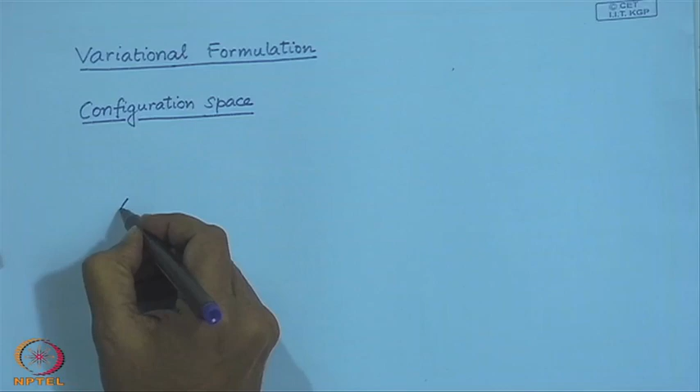Now, what is this configuration space? Let us picture a string, a taut string which has been displaced from its equilibrium position, which is the x axis. Now, suppose I want to represent or track the configuration of this string. The simplest thing I can think of is to track certain particles or material points on this string.

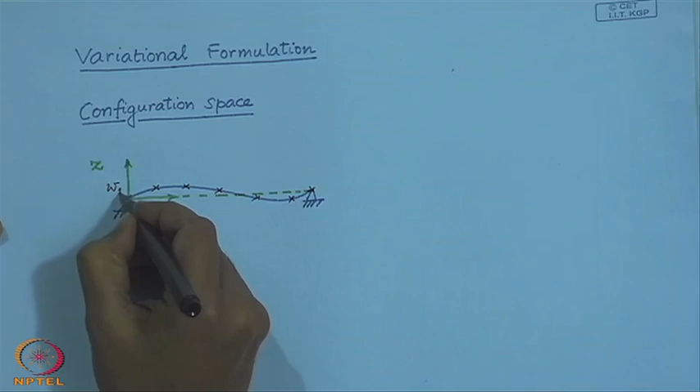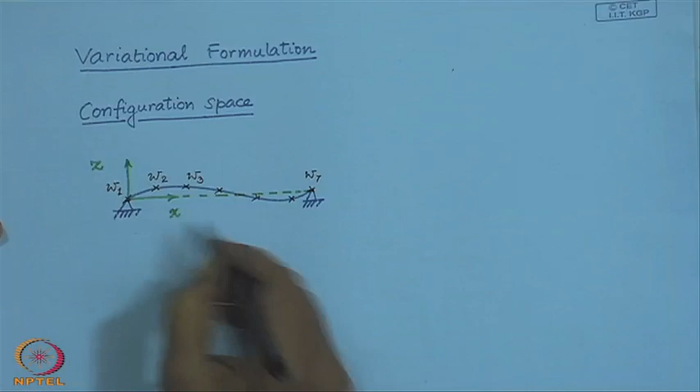So here, for example, I have 7 points. Let me call the displacement corresponding to these points as W1, W2, W3, etcetera up to W7. Now, to visualize the configuration of the string at this instant, I can think of an Euclidean-like space. What I have done is taken 3 axes, and that is the best I can draw: W1, W2, W3, and then there are axes like this up to W7.

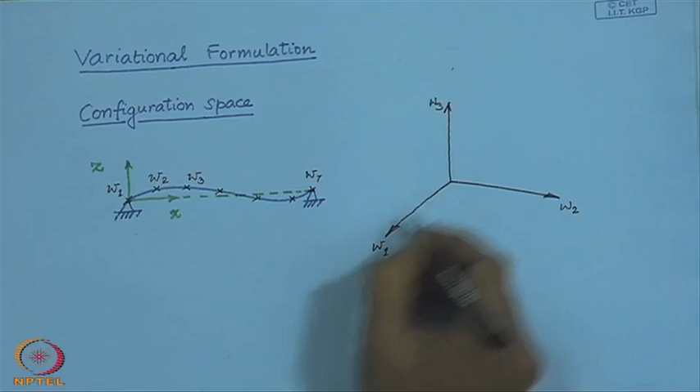I cannot draw a space with 7 axes here, but I will appeal to your imagination to think of a space with 7 such axes, and mark on each axis the displacement of each point. Say, for example, W1 is 0, W2 has a certain displacement, W3 has a certain displacement, and so on. In this space, which is now a 7 dimensional space, there is a point which represents this configuration. So in such a space, a point represents a configuration. This point, for example, represents this configuration of the string.

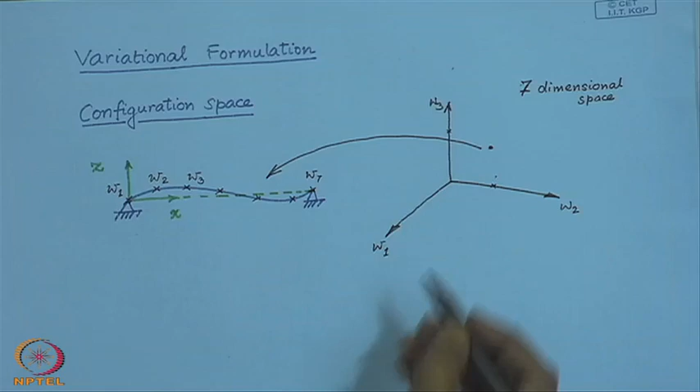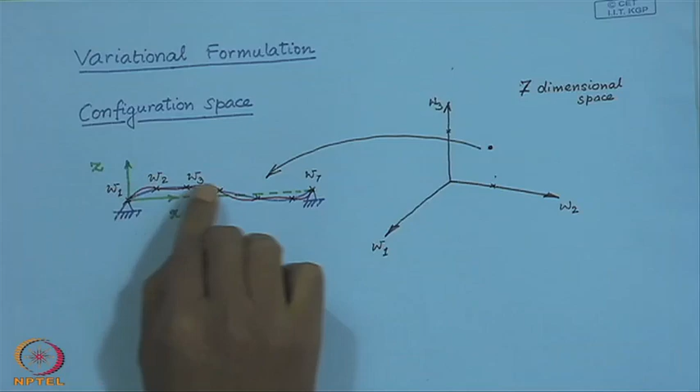But suppose now this string is actually like this. Then also these 7 points have the same locations. I have drawn this red configuration of the string very carefully, so that this point in the 7 dimensional space is the configuration of the string, but we can see from this figure that it is not exactly the same as the previous blue configuration. So what do we do?

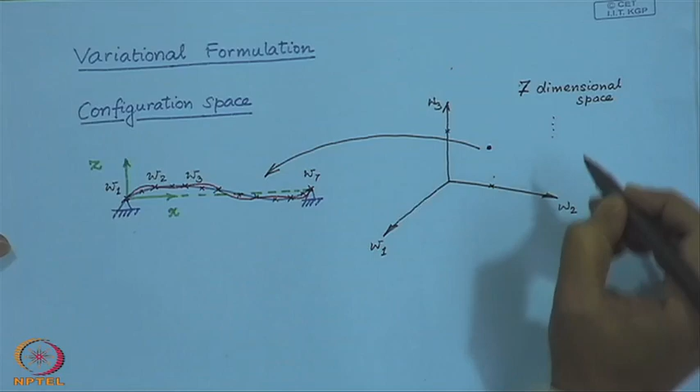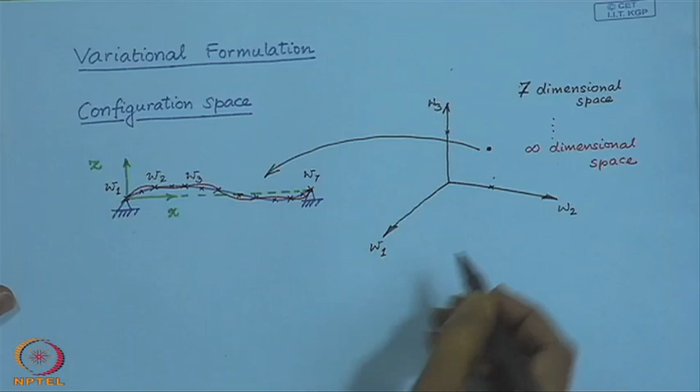We increase the number of points, and if you go on increasing the number of points like this to capture more and more configurations, or infinitely many possible configurations, finally what you come to is an infinite dimensional space, which can track the configurations of the string. So finally, we require an infinite dimensional space to represent all possible configurations of the string.

Then, as you can see, such infinite possibilities, if you want to represent them, require what are known as field variables, and that is what we have been using till now. So W, the transverse displacement of the string from the equilibrium position, is therefore represented as a field variable which can capture all these infinite possible configurations of the string. This space, in which a point represents any configuration of the string, is known as the configuration space of the string.

So therefore you can clearly see that for a string, and for any continuous system, the dimension of the configuration space is infinity. Such continuous systems are represented as points in an infinite dimensional configuration space, and the number of coordinates of the configuration space represents the degree of freedom of the system. So the degree of freedom of a string, or any continuous system, is infinity.

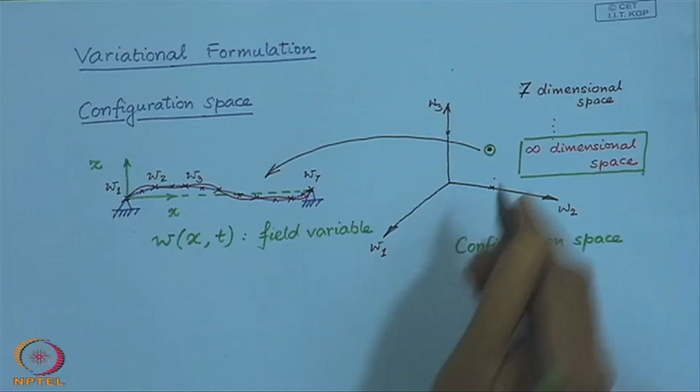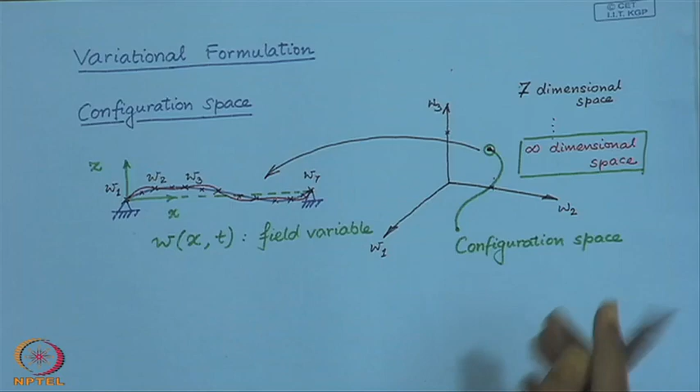What is very important now to move on is to remember that in the configuration space, any configuration of a continuous system is represented by a single point. So, therefore, as the string vibrates, as it moves through configurations, there are trajectories in this configuration space through which the string is going to move. So with this basic definition, let us look at the variational formulation of dynamics.

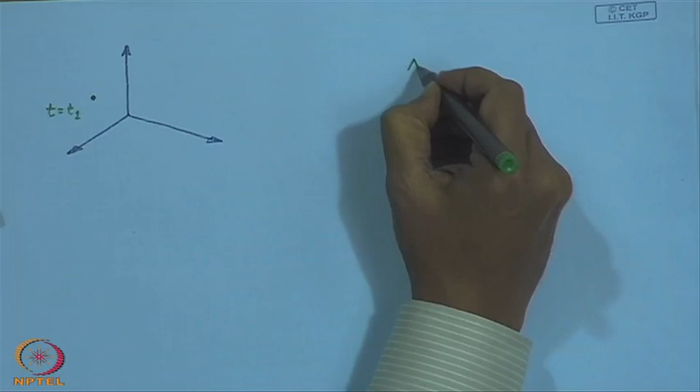Imagine an infinite dimensional configuration space, and at time t equal to, let us say, t1, I observe the configuration of the system is represented by this point, t equal to t1. So this point in the infinite dimensional configuration space represents the configuration of the string, let us say, at time t equal to t1, which may, for example, look like this.

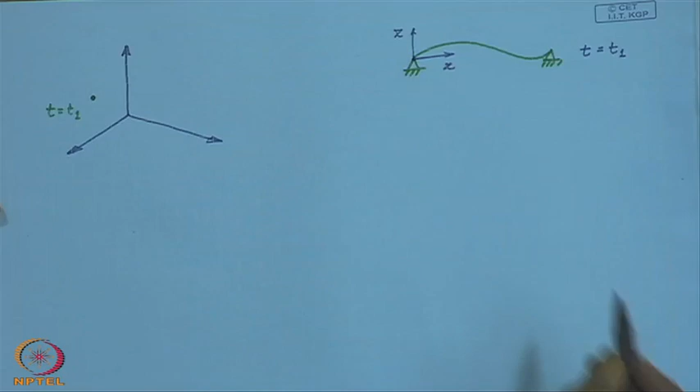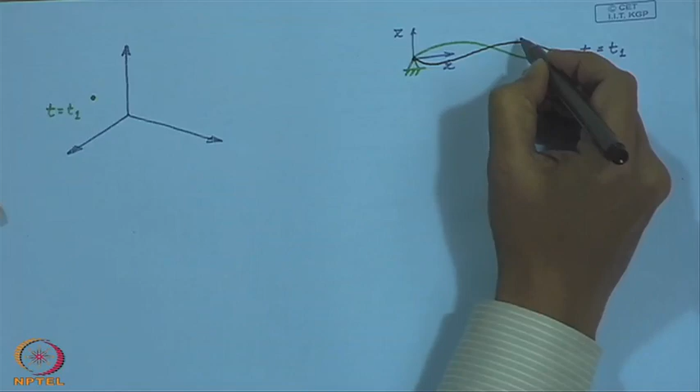Now, this is the configuration of the string that I have observed at time t equal to t1. Now suppose I close my eyes and allow this string to move, and suppose at time t equal to t2 it attains a configuration like this. So this was the configuration at time t equal to t1, and the black configuration is the configuration of the string at time t equal to t2. So at time t equal to t2, I have opened my eyes and I observe the configuration of the string to be this, which is another point in the configuration space of the string.

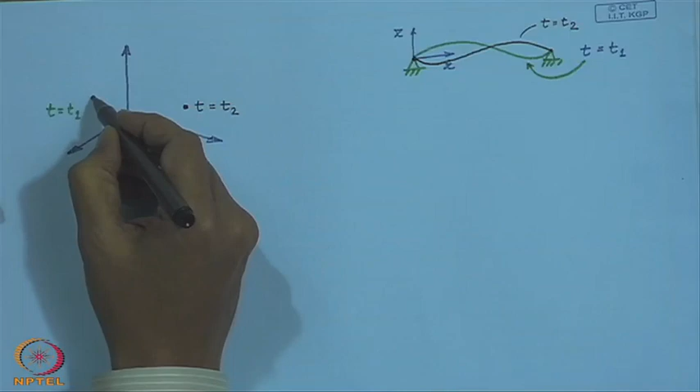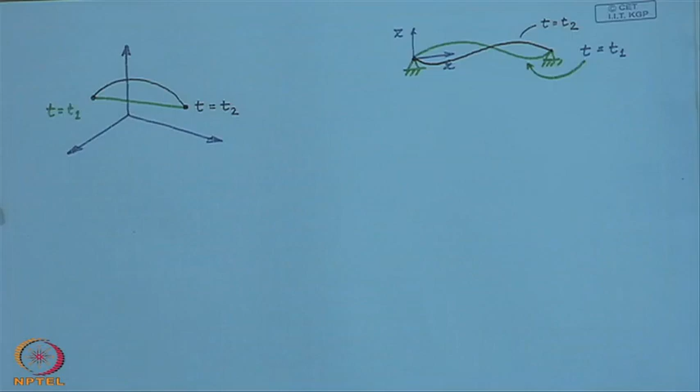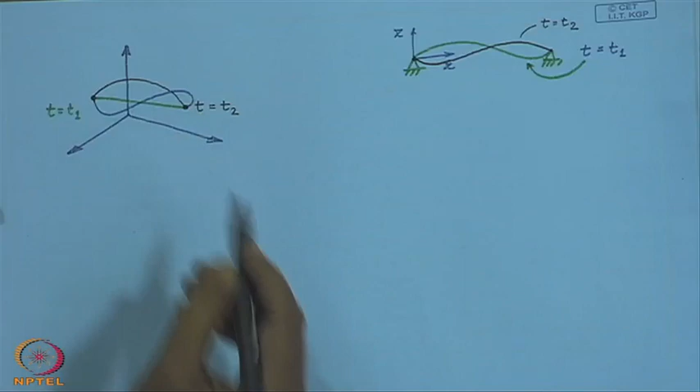Now the question is, how did the string move from this configuration at time t equal to t1 to this configuration at time t equal to t2? Well, it could have moved in this manner, or it could have moved in this manner, or maybe this. The question is, can I say which path did the string follow in the configuration space? So this is our question.

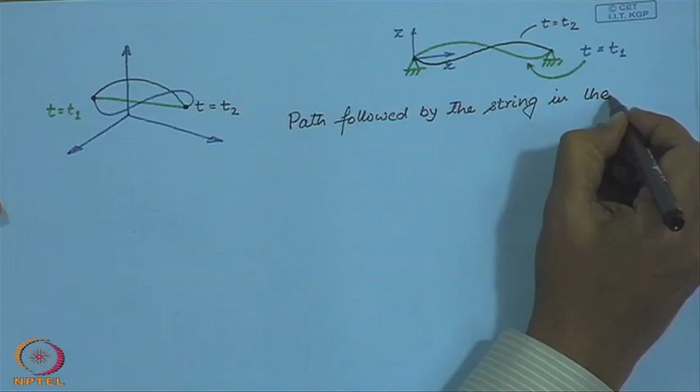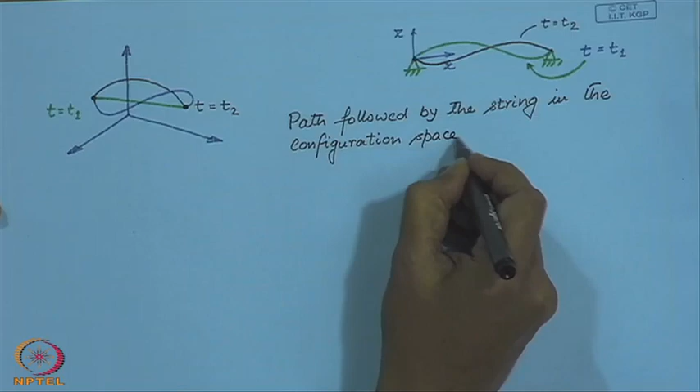So, is there a way of knowing - because I have not seen how it has evolved from this state to this state - is there a way of knowing which path it followed?

So, this question is answered by something known as Hamilton's principle.

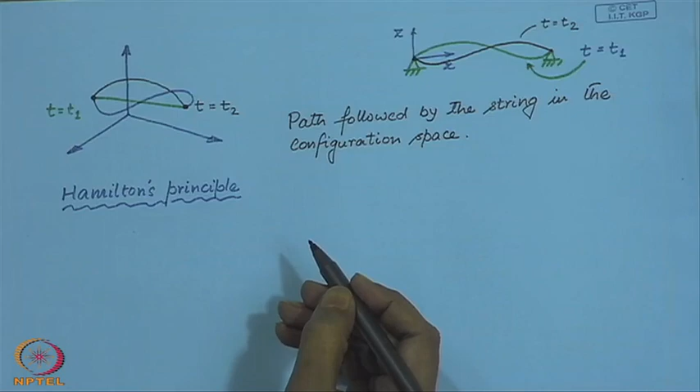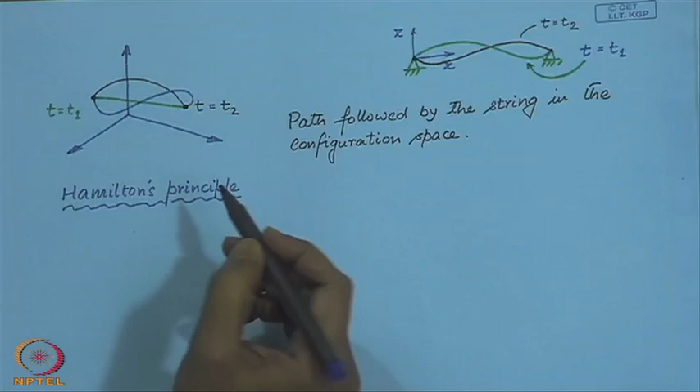So, what is this Hamilton's principle? What Hamilton's principle says is that of all these infinitely many available paths for the system to move from a configuration at time t equal to t1 to another configuration at time t equal to t2, the one the system follows will extremize

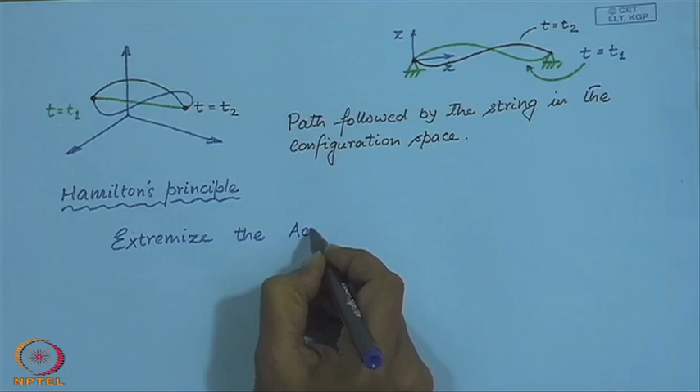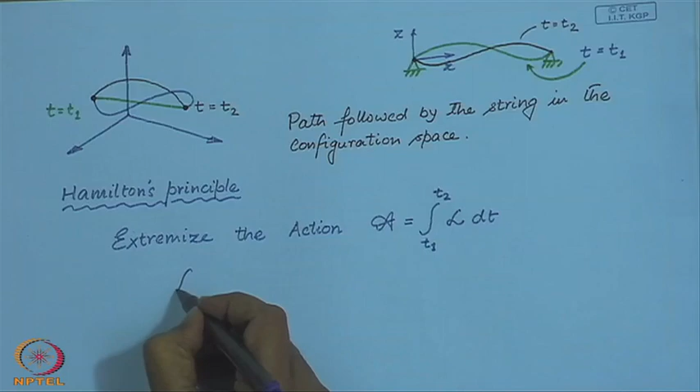the action, which is defined as an integral from t1 to t2 of a scalar known as the Lagrangian, which is again defined as the difference of the kinetic and potential energies of the system.

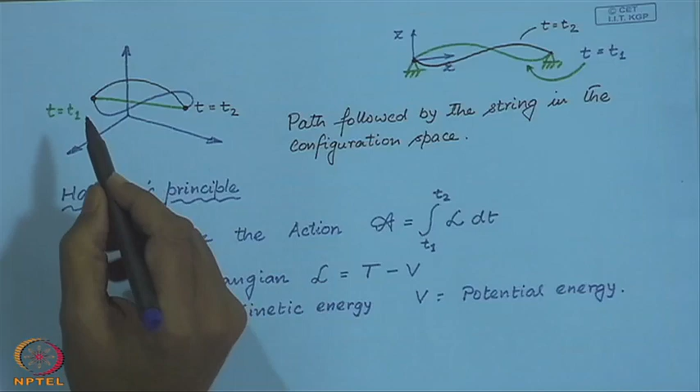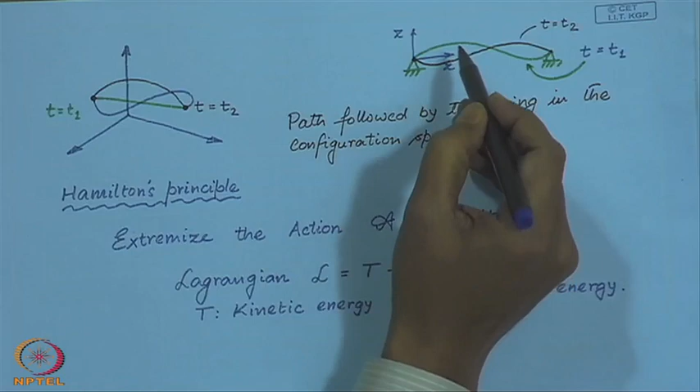So, to reiterate, we have observed two configurations of the string and we have not observed the intermediate configurations - how it went from configuration 1 to configuration 2 - but this principle says that the path taken by the string, or the intermediate configurations attained by the string in moving from configuration 1 to configuration 2, extremizes the action which is defined in this manner.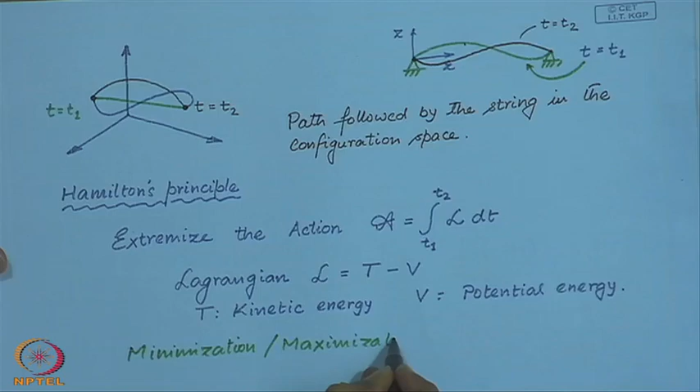Now, what is this extremization? Extremization has a connotation of minimization or maximization. But in mechanical systems such as a string or a bar, this is the connotation of extremization, which is actually minimization.

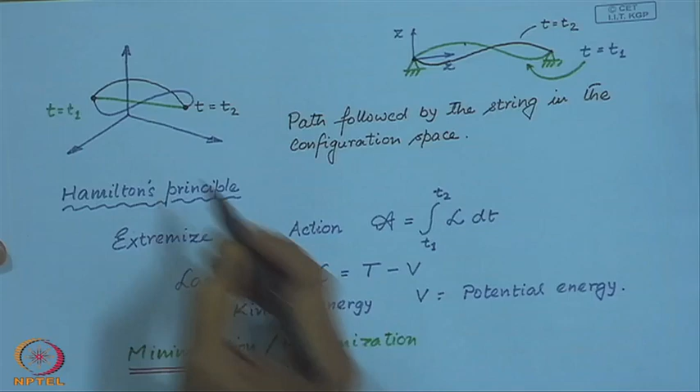Now, let us see what is meant by this extremization. The thing that has to be understood is this: we are talking in terms of paths in the configuration space. So, this action is a function of this path, which is a function of time.

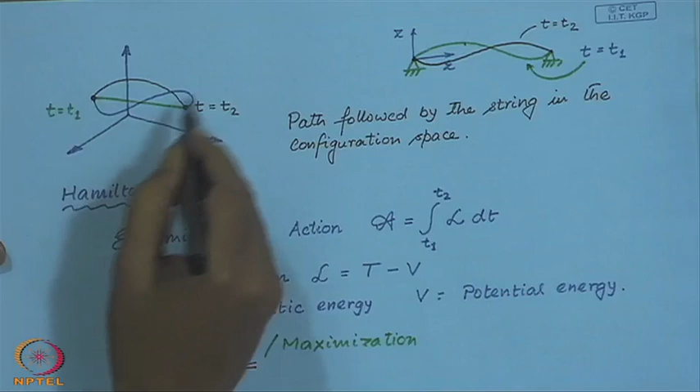So, this action - given the motion of the string, or given the path taken by the string from configuration 1 to configuration 2, which is a function of time - we have defined this action as an integral over the scalar function, which is defined in terms of those paths. Such a thing is called a functional.

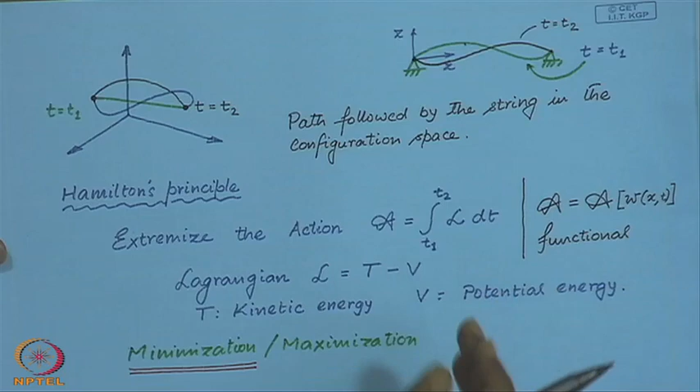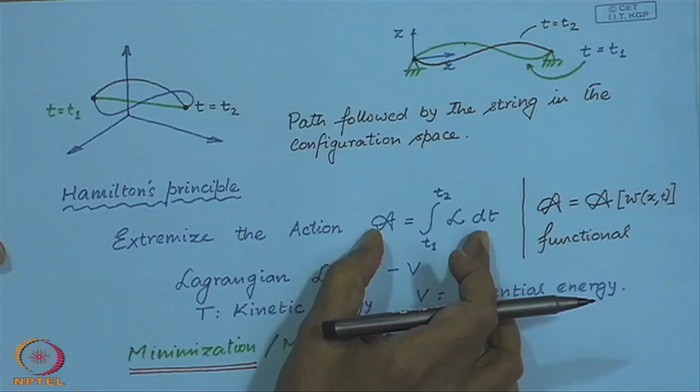So, it is a function of a function. This action is a function of a function. So, we have to minimize over functions. We have to find a function which minimizes the action. Now, this is slightly different from something we talk about in minimization of only functions. So, let us see.

So, suppose you have a function f of x. How do you find out the extremum points? So, these are extremum points. So, what we say is that

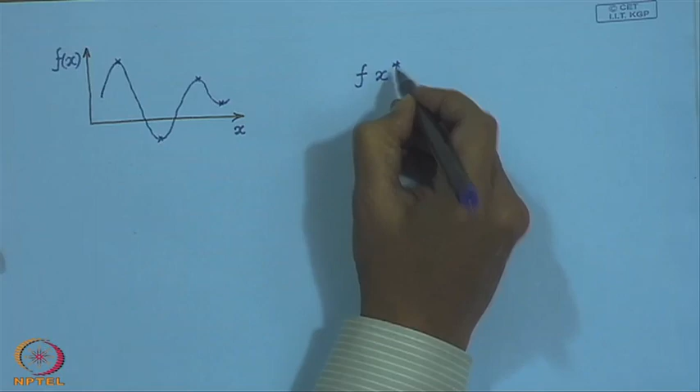suppose x star is an extremum point, in this case a maxima. Then how do we detect that this is a maxima, or how do we detect this point, an extremum point?

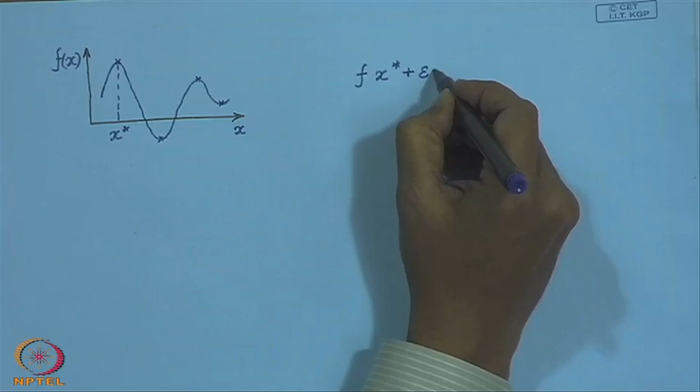So, we make a test. Let us suppose that x star is a solution of an extremum point. Let us make this test. We disturb or perturb this point, x star, by a small amount. I have written this small amount as epsilon times y, where epsilon may be a small quantity.

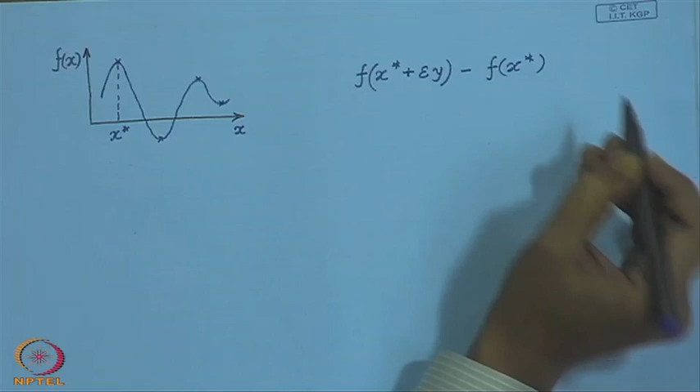Now, if I compare - take this difference, divide by epsilon, and take the limit epsilon tends to 0 - for arbitrary perturbations y, and if this turns out to be 0, then we say we have found an extremum.

So, this is the standard definition, this is in terms of the derivative. This is what we do, but remember this x is a variable.

Now, suppose we want to draw an analogy from here to understand what is Hamilton's principle. So, let me draw an analogy. So, here,

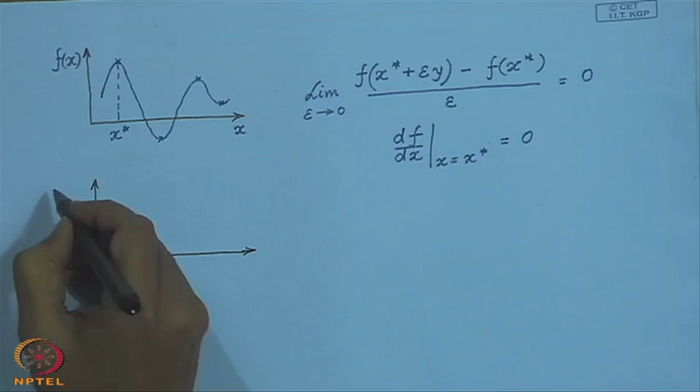by the way, this formulation, this way of doing things, will work even if x is a vector. If x is a vector, then let us see what happens.

If you Taylor expand, then the first term - so this is the first term, there will be further terms. So, finally, those terms will have epsilon. So, when you take this limit, they will vanish.

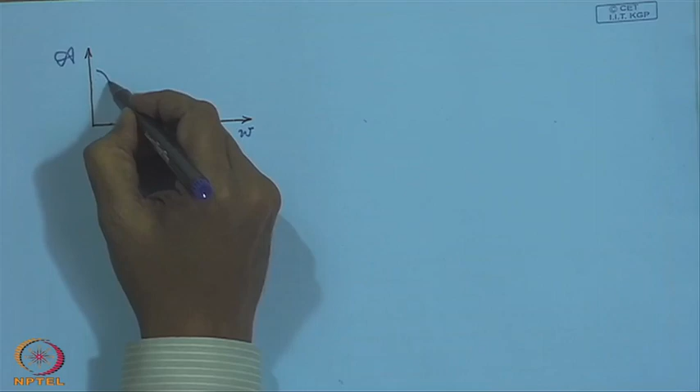So let us imagine for a moment that this is what our calculations result in. If I have to find out the extremum points, then I must calculate this action, and I want to understand in a similar manner what is this extremization.

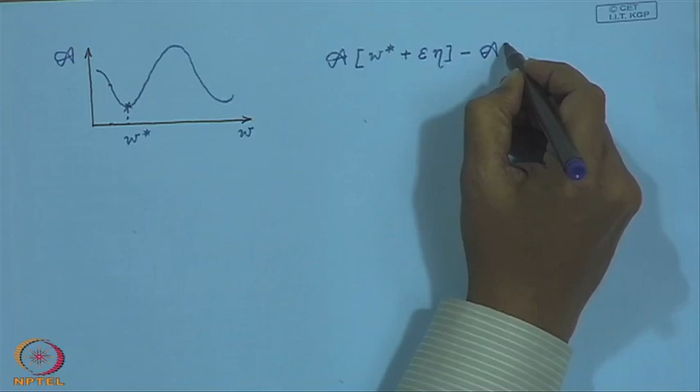So suppose W star is the actual path taken by the particle or by the string as it moves from configuration 1 to configuration 2. This I can perturb with another function eta and a small quantity epsilon, take the difference, divide by epsilon, and take the limit epsilon goes to 0.

And if this turns out to be 0, then I say I have found a path that the string has taken to move from configuration 1 to configuration 2. Remember, this action is being calculated as an integral from T1 to T2 of the Lagrangian.

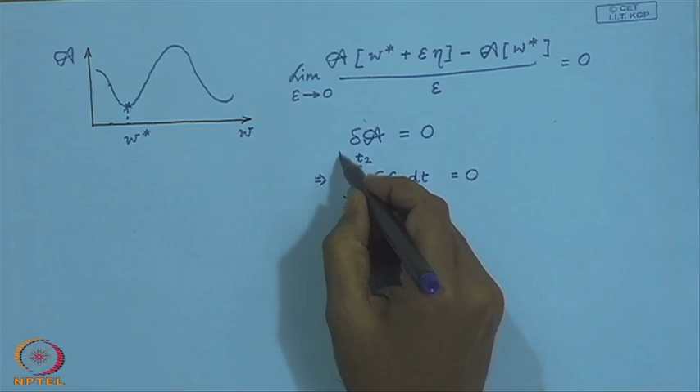Now this is represented in this manner, just as in the case of functions we say del f del x vanishes, here we write delta of the action is equal to 0. So this therefore implies this condition, and this is what we will use in this formulation.

Now what is this delta? Delta is known as the variation operator. It is very similar to a total derivative operator, except that it does not differentiate time. So time is frozen. When this operator is applied, it is assumed that time has been frozen.

All this can be understood if this limit that we have calculated is analyzed. So what we are looking at is paths, and we will be perturbing paths. So time will be held frozen and paths will be perturbed. This variation operator is like a total derivative operator with time frozen.

Now let us go over to some examples and see the application of Hamilton's principle.

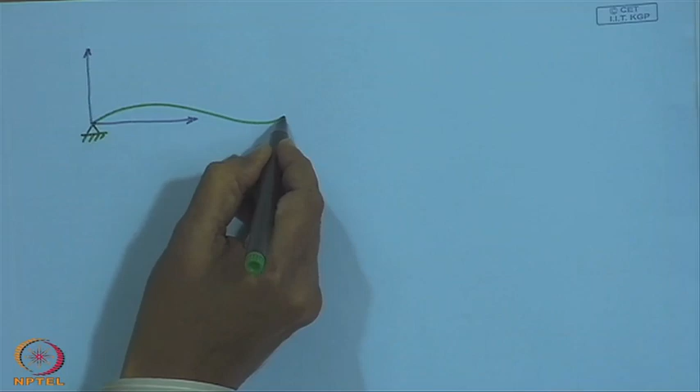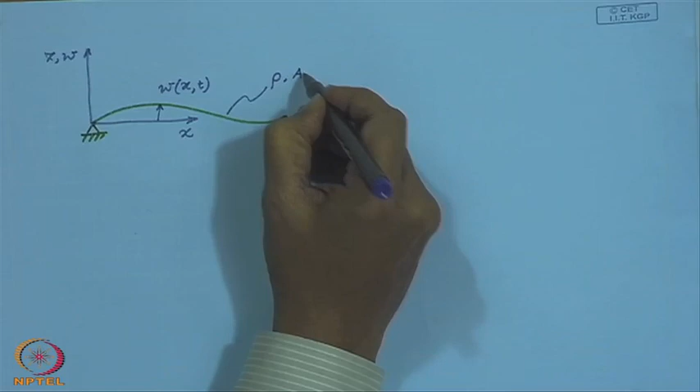So here we have a string whose transverse displacement is represented by this field variable w. We assume that this string is made of a material of density rho, area of cross section A, and is under tension T, and has a length L.

So the first thing that we need to write is the Lagrangian and construct the action integral on which we will apply this variational formulation or Hamilton's principle.

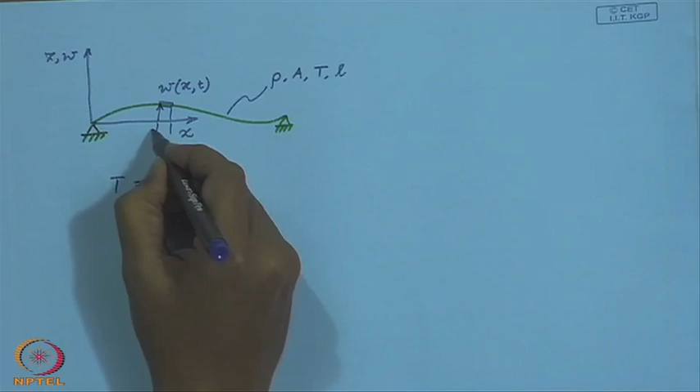So what is the kinetic energy of this string? If I consider a small element of this string at a certain location x, then the mass of this little element is rho A dx, where dx is the length of this infinitesimal element.

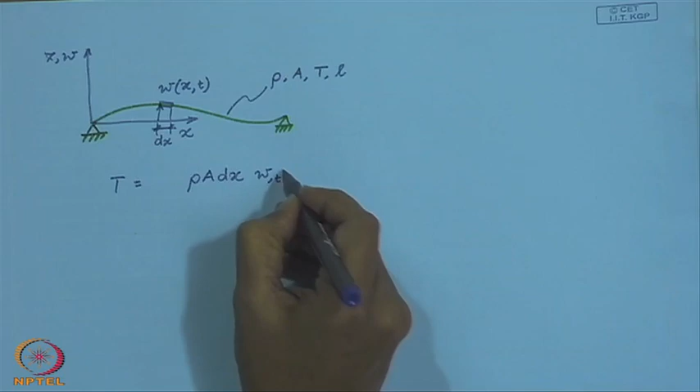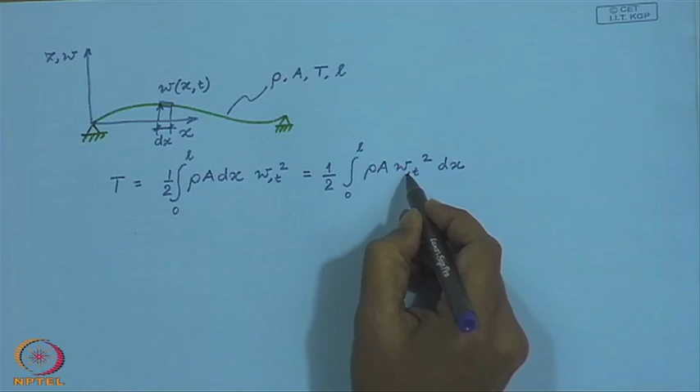Now with this I multiply the velocity square of this little element, and if I integrate this over 0 to L and multiply by a half, then I obtain the kinetic energy of this string. When I write del w del t, so w comma t whole square, this is assumed to be like this. So that is the kinetic energy of the string.

Now we have to write the potential energy. To write the potential energy, let us look at an infinitesimal portion of the string as it goes. So this is the equilibrium configuration.

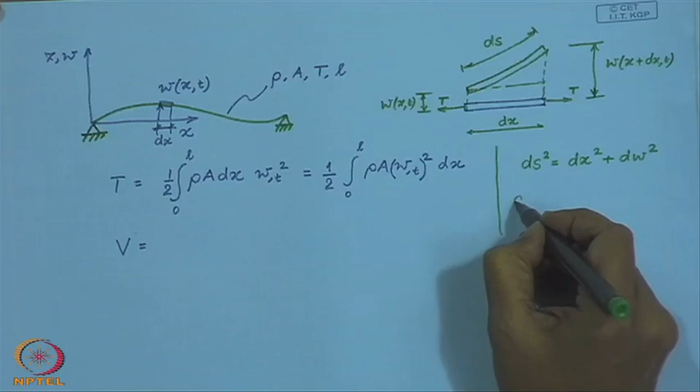So what is this deformed length of the string? This is the transverse displacement at x, and this whole thing is w at x plus dx at time t. So this length can be written as, which may be represented in this manner.

So let us look at the work done by this tension as the string stretches. Tension, which is almost constant, times ds minus dx. Now I integrate this over the length of the string, so that should give me the work done, which is stored as potential energy in the string.

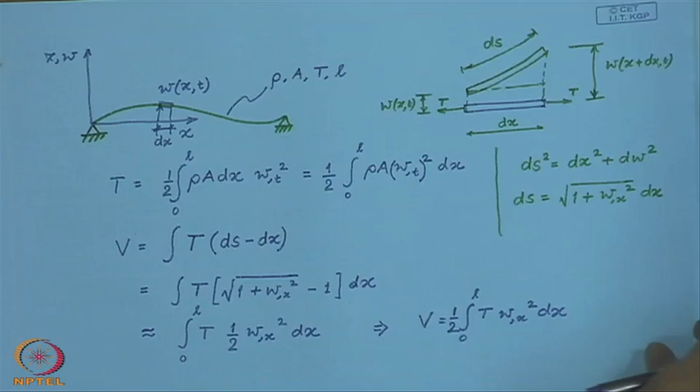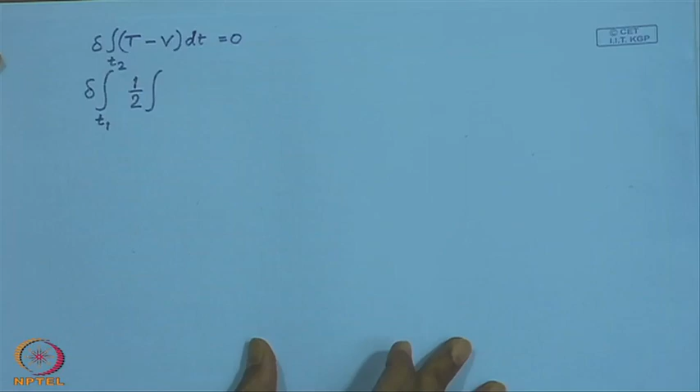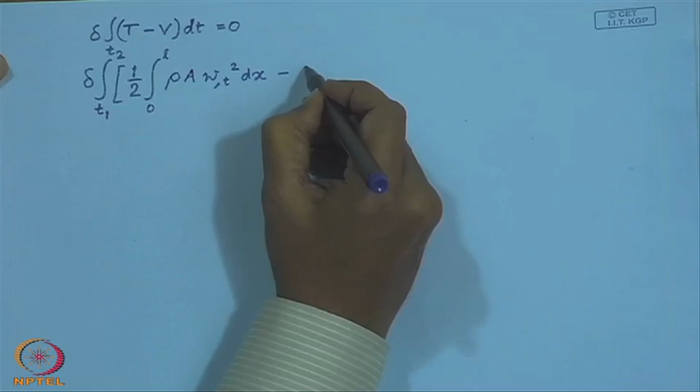Now let us look at the variational principle. So what Hamilton's principle says, let me first write this, which is the statement of Hamilton's principle, which now can be written as this.

And I can simplify this further, in this manner.

Now I am going to apply this variation operator on the integrand to obtain, so del w del t whole square, when I operate, that will give me 2 times del w del t delta of del w del t. Now this 2 will cancel with this half, this 2 in the denominator. So I am writing out the expression after such a simplification.

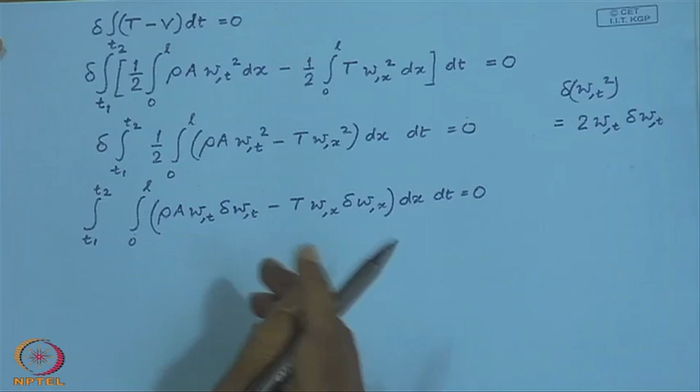Now, as I had mentioned, this variation operator can commute with this time derivative and the space derivative, and this delta w is the small perturbation on the function w. Since we want to separate out this small perturbation, this arbitrary variation over w, I would like to have something in terms of delta w.

Now, to obtain that, I integrate by parts these terms. This will be integrated by parts with respect to time, and this will be integrated by parts with respect to the spatial coordinate x. So if I do that and assume that this integral will commute, then I can write...

So I will take this as the first function, and this is nothing but these expressions. So first function times integral of the second function. So this is the first part obtained from this term in the integrand.

So here, I finally have this.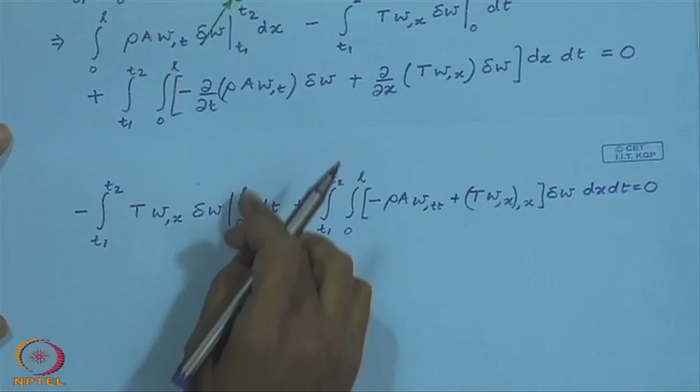Now, the first term in this integral, if you see, the variation is at the boundaries. Delta w and all these terms will have to be evaluated at the boundaries, whereas here they are at the intermediate positions of the string, at all intermediate positions.

Now, these two can be independently done. You can hold the variation over the string as fixed and just vary the boundary, or vice versa. So therefore, if this total expression has to vanish for arbitrary variations delta w, then I must have this integrand here in the square brackets vanish.

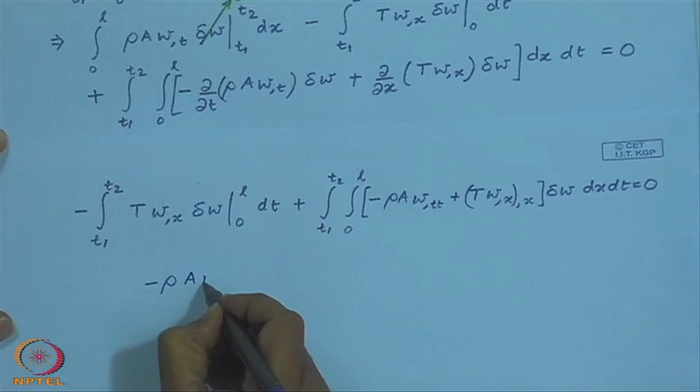So this must be 0, which gives us the equation of motion, as we can easily recognize now.

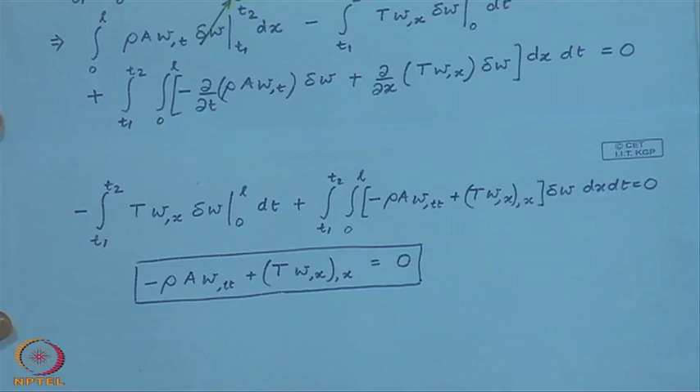And this must vanish at the two boundaries. Now, what this says is that this can vanish in two ways. Say at x equal to 0, let us look at x equal to 0. This can vanish if delta w vanishes, which means that w is fixed.

And for all times it may be 0, or this may vanish at x equal to 0 if this term is equal to 0.

Similarly, at x equal to L, this can vanish if w at L is fixed, or this term is 0 at x equal to L.

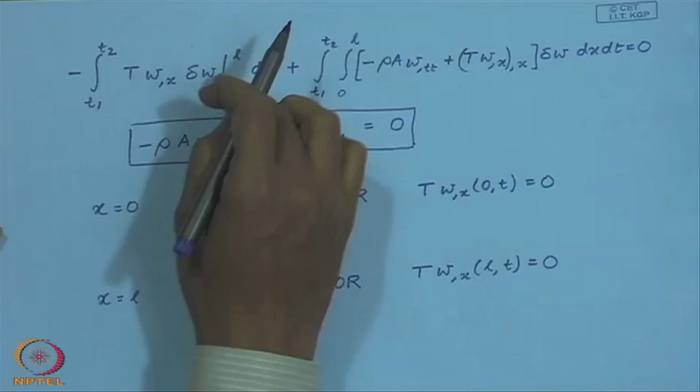Now, since this is being evaluated at x equal to 0 and x equal to L, both terms must vanish. So either this equal to 0 and this equal to 0, or this equal to 0 and this equal to 0.

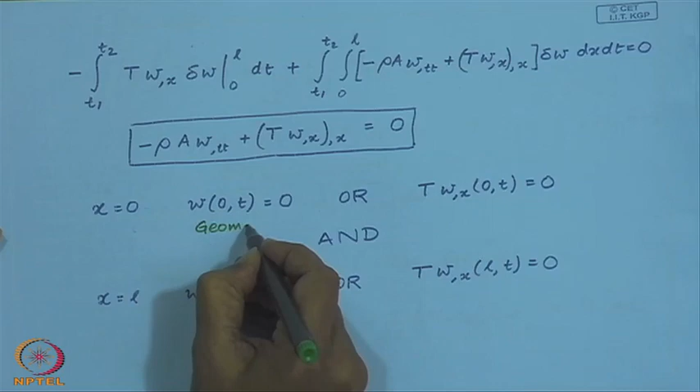So various combinations are possible at the two boundaries, and you can now easily recognize that this condition of zero displacement, which is like a fixed end, is a geometric boundary condition, whereas this is a force condition. And the same thing here.

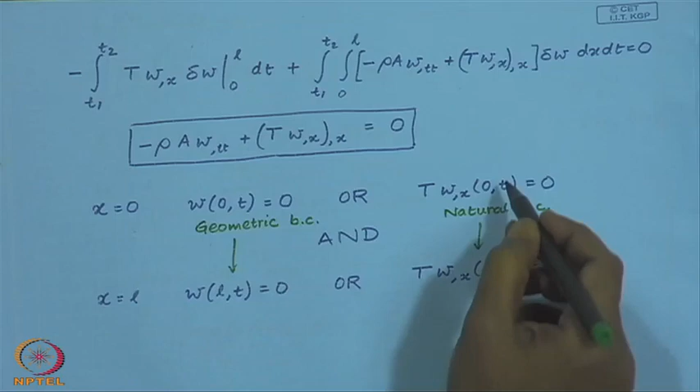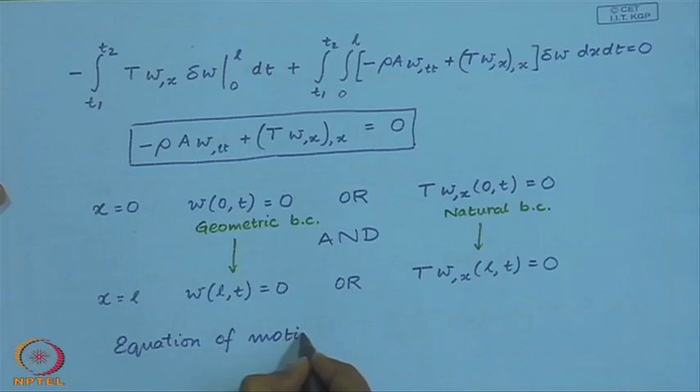So what are the various possibilities? Both ends of the string are fixed, or one end is fixed and one end is sliding, or both ends may be sliding. So what we find here is that not only do we get the equation of motion, but we also obtain all the possible boundary conditions.

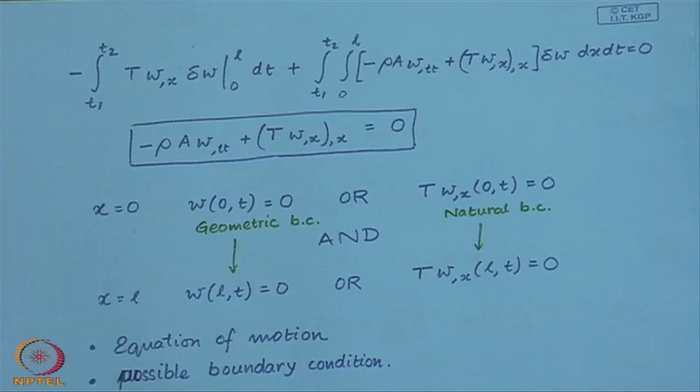So when we use the variational formulation of the string or any continuous system, not only do we get the equation of motion, but we also get possible boundary conditions. Now, this is an extremely powerful method for formulating the equation of motion of very complicated systems.

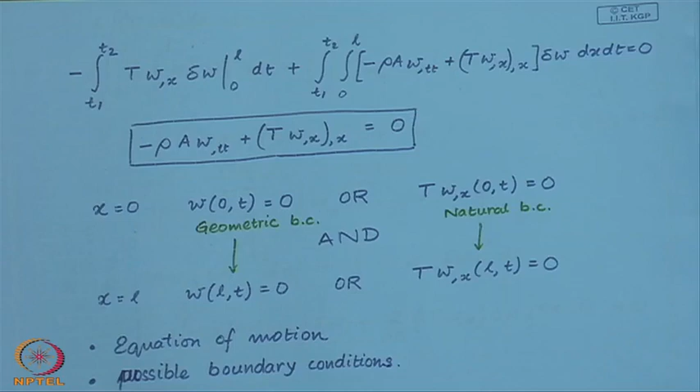Now, this variational formulation is not just an approach for finding out equations and boundary conditions. It is also, as we will see later, a method which will help us lead to numerical methods for computational purposes, and very powerful methods have been based on these variational principles.

So to summarize, what we have discussed in today's lecture is the variational formulation of dynamics of a continuous system, and we have looked at Hamilton's principle which forms the basis of this formulation. Before that, we looked at what is a configuration space of a continuous system, based on which this Hamilton's principle works. Then we finally took an example of a string and derived its equation of motion, and also obtained the possible boundary conditions for the string.

So we end the lecture here and we will continue further.